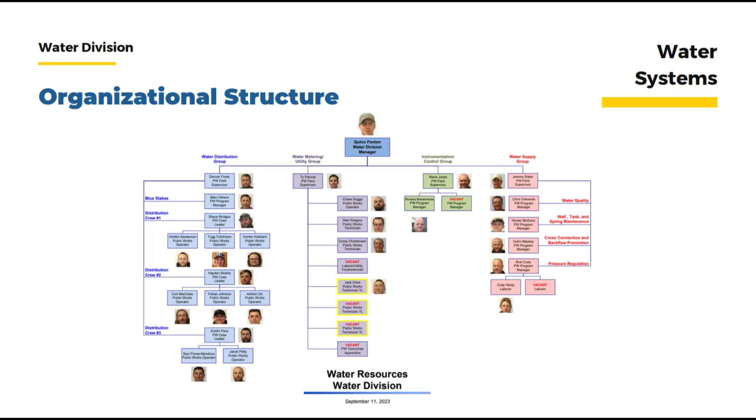So with that, turn it over to Quinn. All right. Well, as has been mentioned, I'm the division manager and new to that position for about 1 year. I have worked for the city for 28 years, and most of my time has been spent in the field as a field supervisor, crew leader, technician. Most of that time has been in water supply, so that's kind of my passion. But the manager position has brought some new challenges, and it's been fun to learn some of the roles and the administrative parts, and it's definitely been challenging and fun.

But a little bit more about what happens in the field. That's what, as Reed mentioned, I'm going to talk about today. Just as a little introduction, you look at our water system, and it's old, but it's a pretty big system. Over 350 miles of main line out there. If you look at the amount of service lines, 23,798 service lines. That's the line that connects from the water main that goes into the meter.

And our guys get a lot of calls on those. The city is responsible for those also. Probably I'd say about 25% of those are galvanized. Back in 2015 it was about 40%. So we've been replacing a lot of those galvanized services as we go also. We have 12 pressure zones.

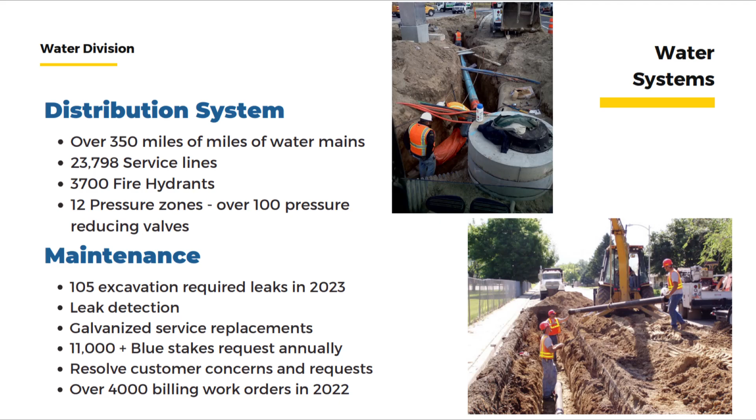On the supply side, as Reed mentioned, we have 3 sources of water. Surface water, 60%. Springs, 15%. And groundwater, 25%. And we'll get into each one of those just a little bit more as we go through these, but that's where Orem's water comes from.

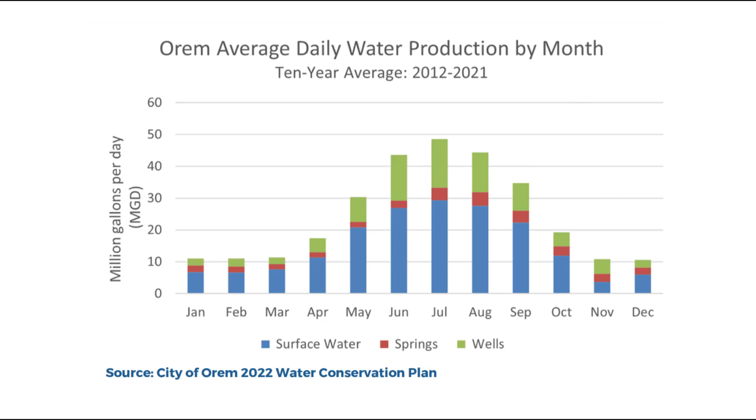So water supply in 2022, we produced 7.69 billion gallons. Our average daily production for the year was 21 million gallons. That's for the whole year. So during the peak summer months, May through September, we were 34.4 million gallons per day. And then in the off-peak months, our average was 12.2 million gallons. The highest recorded that I've seen is 61.5 million gallons.

So I was explaining that to my kids last night. And they're like, that sounds like a lot of water. How much is that? 61 million gallons in 24 hours? Is that a lot for a city or whatever? And so I said, let's do a little Googling. So we jumped on the internet. An Olympic swimming pool holds about 600,000 gallons. So that is 100 Olympic swimming pools in 24 hours that Orem used. If you line those Olympic swimming pools up end to end, it's 1 mile of Olympic swimming pool in 24 hours. That's a lot of water to get treated and delivered to the customers.

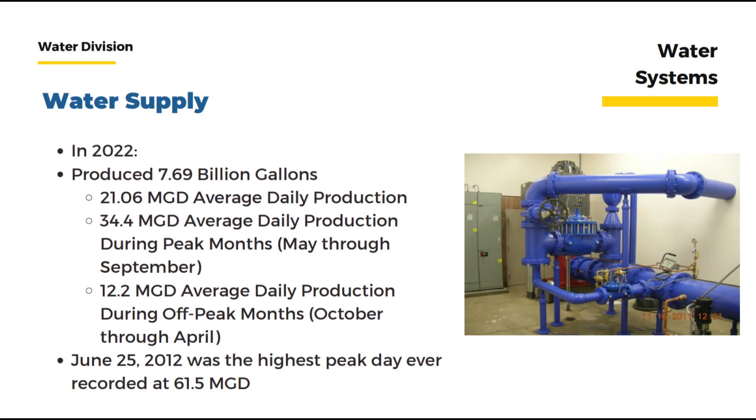So a little bit about our wells. We actually have 10 wells, 9 equipped wells that are ready to go right now. 8 of those wells are electrically powered, and 1 of them is powered by natural gas. The water section also has a 600 kilowatt mobile generator that's capable of powering 5 of these wells, one at a time, in the event of a big power outage.

And the natural gas well also has a backup generator, so in the event of a power outage, that will run also. Five of the well sites have gas chlorinators. The water quality is good enough that it doesn't need to be chlorinated, but we like to keep a chlorine residual throughout the whole distribution system just to meet state standards and to reduce any potential bacteria in the water.

We have 11 chlorine analyzers that monitor the chlorine residual 24 hours a day, and we watch that and maintain just a residual that keeps the water safe. And so, any questions? Quinn mentioned we had 9 wells that are outfitted to pump water. The 10th is the new one that's right next to the tank project on 4th South and 4th West.

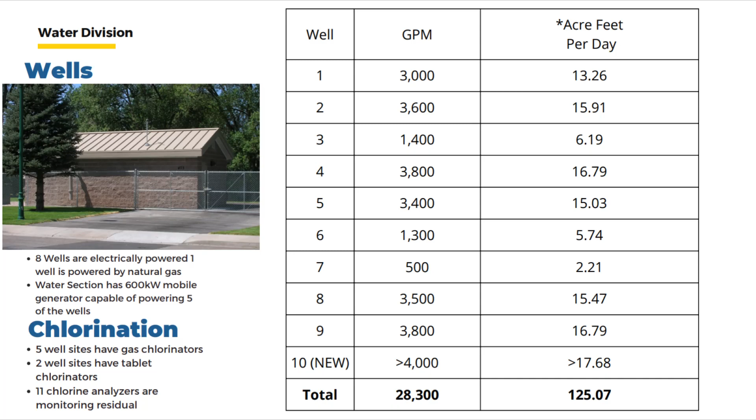So a little bit about the springs. The spring flow will follow the snowpack, so it's kind of fun to be able to watch that as the weather year starts in October, and then by January, February, we start to know how good the springs are going to be doing, and then as the runoff starts, you can see the chart up here. The red line was our flow for this year out of the springs. The purple line on there is average. Over on the left side of that chart is the gallons per day.

So the springs were producing over 7 million gallons a day. That's the peak this year. The average, right there where Reed's pointing, that's typically what it produces. Well, the snowpack was that much above average, and so hence the springs produced that much more. It was an awesome year.

Do we share that with anyone? Do we have full water rights to that? Yep. We don't share it with anyone? No. And the Alta Springs is the cheapest water in the city also, because it's all gravity. It comes down off the side of Timpanogos and is transferred over to some tanks. All we do to that is add a little bit of chlorine to it, and it's pristine water, and it already has that elevation, so it doesn't need to be pumped or anything.

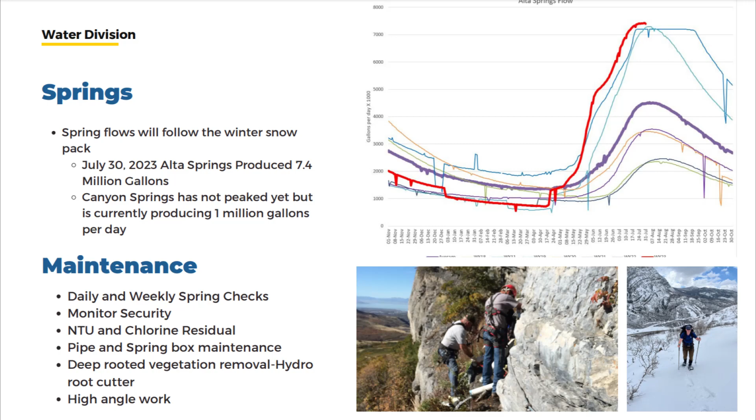It does require a lot of maintenance, the springs do, and that's kind of what, when Reed was introducing the groups, that's what our supply group works on. Do daily and weekly spring checks. We monitor the security there. We check turbidity and different things that could be a potential water quality issue. Pipe and spring box maintenance, deep-rooted vegetation, and some high angle work up at our upper spring.

And then the surface water component, the city has rights, natural flow and storage rights that are accessed through the Provo River that come from the high Uinta area. And those storage rights are held in Deer Creek and Jordanelle. And this is the 60% of the city's water. This is where it comes from and is treated at Central Utah's plant. And so, yeah, I don't know if there's any questions or any comments on any of that.

If our forefathers hadn't participated in these projects, we wouldn't be the city we are now. To have 60% of our water come from these sources because they had the foresight to grab shares in companies and water and water rights.

We're grateful to them. We have a diverse portfolio of water in our wells and our surface water, and in our springs. There are communities that rely solely on wells, and who knows, 50 years from now, where will the water table be? Will they be able to pull water out? Who knows?

Yeah, that brings up a good point. If you look at the water rights up there and the amount of acre feet, it could supply the whole city all the water for the year, but you never know if it's going to be a dry year. The river commissioner might say, hey, the Provo River is being cut, or your natural flow water is cut, and so the planning, it is awesome that they acquired that water. In dry years, there are communities that come to us wanting to rent our water for the year. If we don't need it, we're happy to rent it to them.

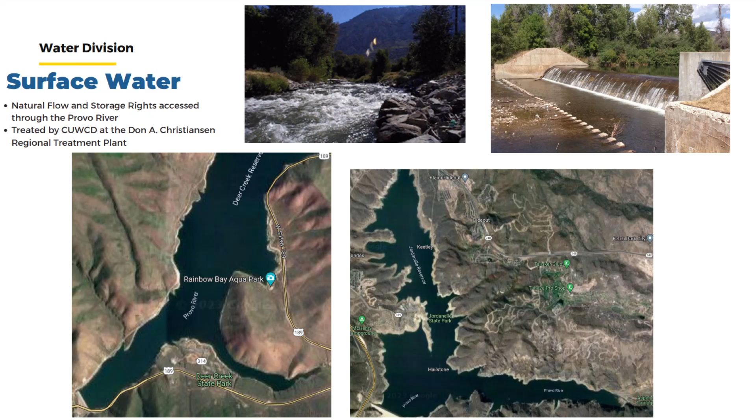We have a 3 million and a 5 million gallon reservoir down there. They're steel constructed tanks. They were completely sandblasted and recoated in 2011. And then we have the two upper tanks that the springs feed, and they are both buried concrete tanks. And there is also a pump station that has the ability to move the water between the tanks. And then we have a 400,000 gallon tank above Skyline Drive that feeds just a couple subdivisions there, and there's a pressure release valve there also.

And then a 50,000 gallon reservoir up the canyon that houses the water that comes from Canyon Springs, and that's where it gets chlorinated and then pumped down the canyon. So currently about 22 million gallons of storage, and as we mentioned, some days we could have 50, 60 million gallons of use. As a state requirement, they like you to be able to store so much water for peak day, and that's the point of the 10 million gallon reservoir that's being built currently. That's going to be down on 400 South. With that tank, we will be in compliance with the state's recommendations of how much storage we should have.

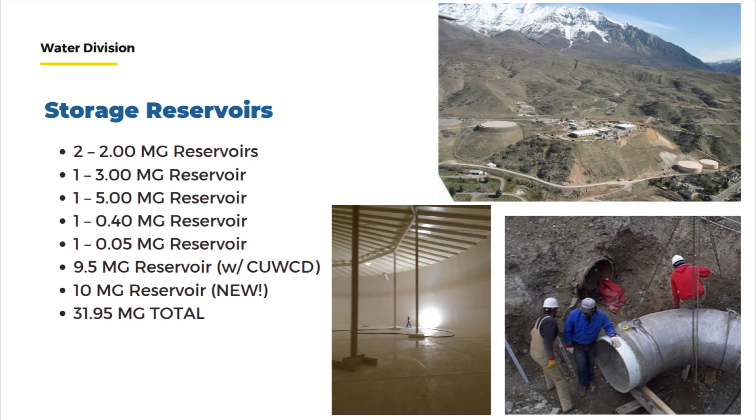Water quality, we have an annual sampling program. We have a water quality program manager who does a great job, and he follows the state's guidance on sampling, and he goes out and does a lot of routine sampling that is required, but he also does a lot of sampling that is not required, just to keep an eye on water quality. One of the main things that we test for is bacteria. 1,272 routine samples last year.

Anytime a new water line is being constructed, we follow AWWA standards and also pull bacteria samples on that before it can be turned into the system. And then investigative samples aren't required, but we do those, like in the spring if we haven't used the well for quite a few months. We're going to pull a sample on it before we assume that it is good, just to make sure that there is no bacteria.

Every 3 years, the state comes down and does a full inspection. It's called a sanitary survey on our drinking water system, and they review our cross-connection control program. They go to all of our facilities, springs, tanks, wells, and they go looking through there and do a thorough inspection, and then they assess points where they find something small like a screen is the wrong size, might be 15 points, or a gasket missing on a tank might be 50 points.

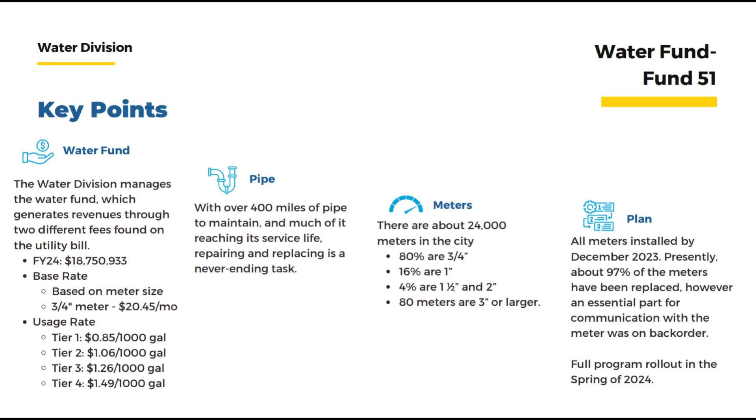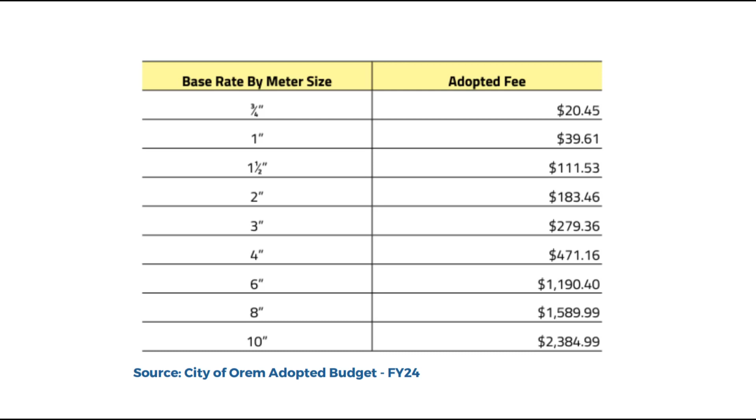Yep. Let's see. So, the water master plan. In 2016, the city went through a rigorous process to create master plans for the entire division, for the water, wastewater, and stormwater systems. The main purpose was to come up with a capital facility plan. What infrastructure does the city need to invest in, and ultimately what is it going to cost? So there was a rate study that was applied with that as well. It was finalized in February 2016. It was updated in 2021, and we need to update our impact fees as well.

So we're going through another minor update of the master plans again, so that we can update the impact fees, or the fees that are charged to developers when they come in and want to put a development in. So we're currently finalizing that. We will run the draft versions of those plans by this group to get buy-in. Your influence back in 2016 was very influential to help educate the city council and show support for doing this.

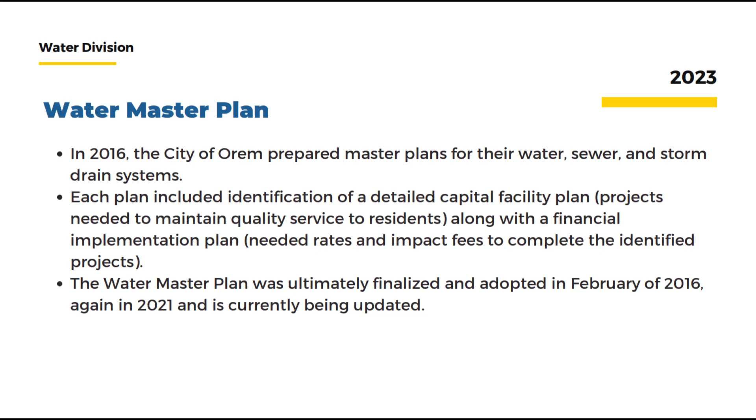The city council can also point to this group and say, LaNae would be the representative that said that yes, there was great support from the Public Works Advisory Commission to support this plan. This is something that we need to do. So you will have great influence when it comes to adopting the updated plan here in the next several months.

The plan back in 2016 suggested that we needed a 10 million gallon water tank, a new well, number 10, a booster station, and also recommended doing AMI, the advanced metering infrastructure. All of those projects are in process right now. The AMI project should be completed this year; the tank, the booster station, and well should be completed in the next year and a half or so.

It also identified other projects that we need to be planning for. One was to relocate well number 1, which is near the hill, in the Hillcrest neighborhood. Also to put a new well in, which we have called well number 11, and that would be up on 1600 North, just east of State Street, is where we've identified the ideal location would be.

And then I mentioned earlier, because the community will continue to grow, and with our new tank we will meet the state's storage requirement. It's expected that we will need an additional storage facility or tank somewhere in the city, and so we'll be doing that in the next 10-15 years as well. And then what quadrant do you need that? Right now the location that we've identified is in the northeast quadrant. It'd be up by the treatment plant. Would it? Okay.

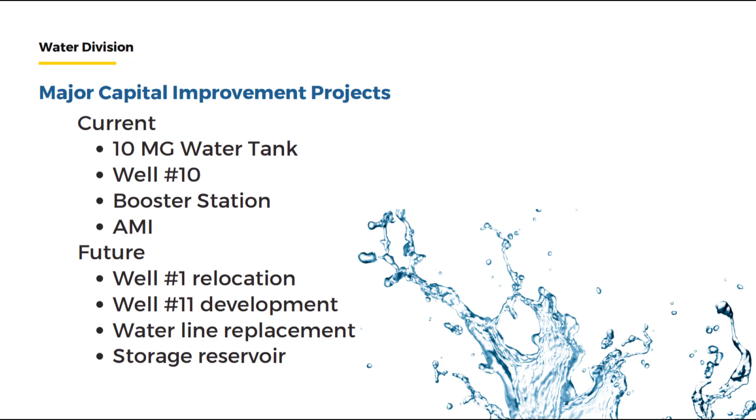Okay, I mentioned the utility rate study. We had Lewis, Young, Robertson, Burningham review all of the rates, and they suggested what our rates should be so that we could meet our debt obligations as well as continue operations and maintenance of the system. And the City Council has been receptive to the plan that's been put in place. You'll recall back in 2016, the rate study was a pay-as-you-go plan. Let's save up and pay for these projects with cash.

However, the current city council decided to bond and spread the responsibility of paying for these large projects over many years, to users that will use it for many years. So there are bond obligations that we have to pay for as well. That was also with the rates that you could get on the bonds at the time. Yeah, we had excellent rates. Yeah, we should have borrowed a lot more.

Is this also being updated as part of the master plan update? Yes. In fact, there are some projects that we listed here that will be included. We're looking at aquifer recharge, which will come at a cost. We need to add that in there, which would increase the capital costs. In particular, water reclamation. In fact, the City Council approved a $160 million capital facility plan over the next 20 years,

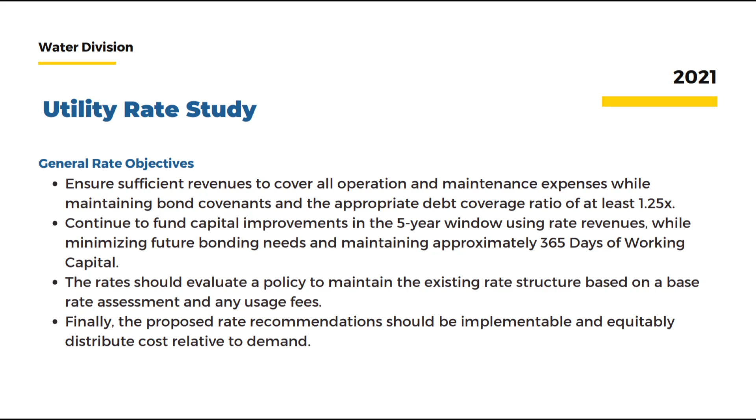And then in 2016, we bumped the rates, and then in 2021, we brought them down. Was it 15%? Yeah, about that. Okay. And the reason that we were able to drop the rates was because the decision was made to bond. So we didn't need to save a lot of cash. We just needed to make debt payments over 20 years. And so we didn't need as much money to do the projects that we had. And then we changed it. Would you go to the tiers?

So were the changes made on tier 2 and tier 3 then? I'm trying to remember. The rate, or did we increase the gallons per tier? No, the gallons in the tiers stayed the same. It was just the rates that changed. Okay. And I believe all of the rates in the tiers were decreased, if I remember correctly. That was in 2021. Yeah. Because we're still getting pushback on that. That you didn't go low enough? Exactly. From the residents. I get emails all the time. Yeah.

There is a sense of pride that the city has had to say we've got the lowest water rates in the state. But if you have the lowest water rates, you're not investing in your system as much, and as the manager of the system, that's concerning.

As a citizen of Orem, I recognize that I have not paid my fair share to replace this system over the past 25 years that I've lived here because we've had low water rates. I feel I should have paid more because it costs to maintain the system. If we kick the can down the road and keep the water rates really low, at some point things are going to become much more expensive to replace.

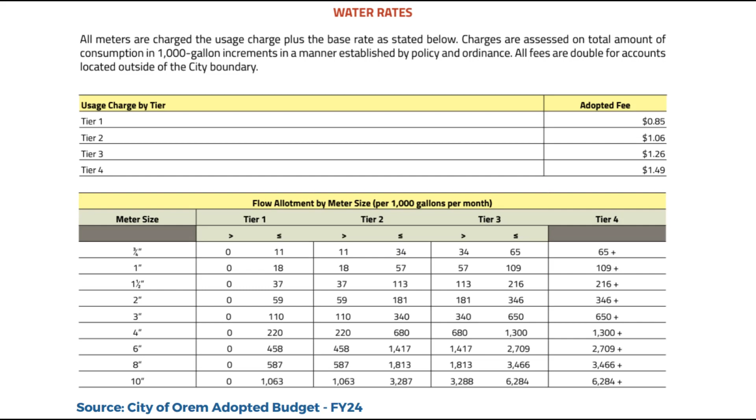All right, another thing is the water conservation plan. If you recall, a year ago, I presented to this group the water conservation plan, which needs to be adopted by the city council every 5 years. So we updated it last year, and this is basically the plan to make sure that we're making great efforts to try to promote water conservation in our community.

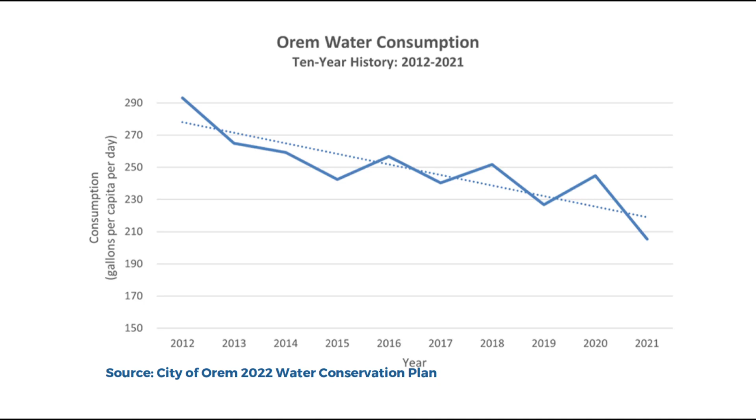I think that there's a greater understanding through the public of the need to conserve. But you can see that we've dropped down to below 210 gallons per capita per day just 10 years later. And that was during one of the worst droughts we've had in recent history. Yep. Which was quite ironic. Pretty amazing.

It will, because there's some properties that haven't watered at all that just look really bad, right? And they need to do something about that. So we'll see what happens.

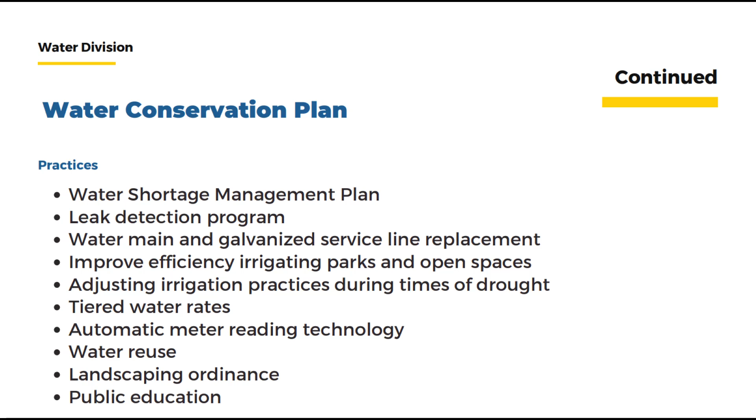Let's see, these are some of the practices that we want to encourage, which are reflected in the water conservation plan. We finished an all hazards emergency response plan, which Quinn knows more about than me, so I'll let him speak to that. Yeah, so the America's Water Infrastructure Act in 2018 required municipalities to have an approved emergency response plan put in place. And so a consultant was hired, and they brought in all the key players in the water system, and they did a vulnerability assessment.

And it was a little bit eye-opening because they looked at certain things that maybe we weren't really thinking about, where we were vulnerable as a water system, like new employees or cybersecurity of our SCADA system. I mean, they looked at earthquake, and then they would score everything on how likely it was to happen. And it was interesting because they said, how about a wildfire? And we're like, oh, a wildfire's not really going to affect us. And then the range fire happened right in the middle of it. And then, how about a pandemic? Oh, well, I don't know. And then COVID's happening. We're going through all this during COVID and having to do a lot of the meetings remotely.